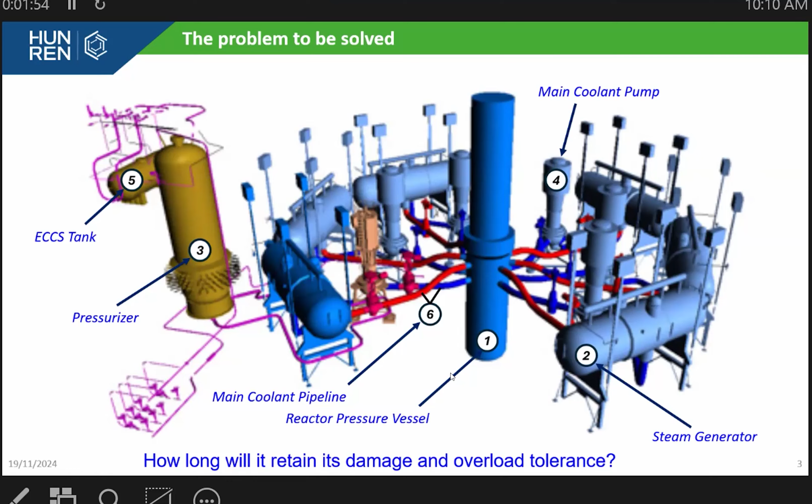These systems are designed for a finite lifetime, called the design service lifetime, with design safety calculations. The design safety calculations give a first value for the prognosis of the lifetime of the unit. This calculation must be repeated for the operating system—the so-called structural integrity calculations—which give a value for the technically allowable lifetime of the unit. Because of better materials than assumed during design, these give a higher lifetime.

Nowadays we face a new challenge because owners want to use these units in the so-called long-term operation regime, which is more than two times the original lifetime, when some synergetic effect in aging can appear, but nobody knows when.

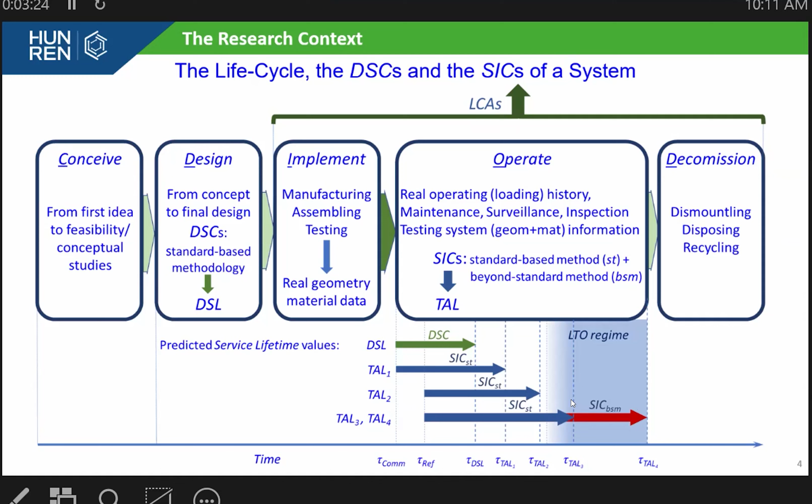That's why we started a research project about 6-8 years ago to see what the possibilities are to improve the calculation methodology.

At first, we made an overview of the design safety calculation methodology, which is based on a disciplinary worldview. These calculations form a loosely coupled system of thermal field calculations, stress strain calculations, aging, and fracture mechanical calculations. The thermal field calculations are based on the classic theory of heat conduction, and the stress strain calculations on strength calculation methodology or theory.

The fracture mechanics calculations are based on the global fracture mechanics approach, but the description of aging has at the moment no unified or accepted theoretical basis.

The main question of the research was how to generalize the methodology so that we can justify that a new approach is good or better than the original one, and that the generalization is plausible. It is not a trivial task.

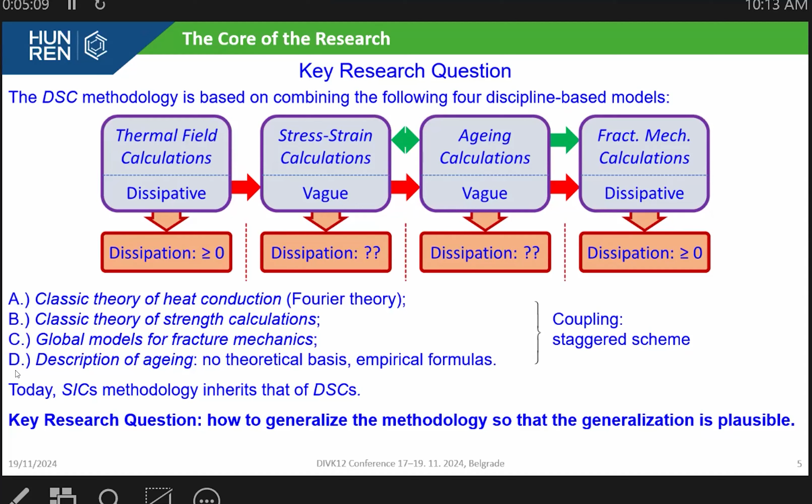At first, I want to give a general note. We know that human culture is a unified one, or there is only one culture. But nowadays a progressive specialization can be observed, which causes many problems even in complex technical projects. We have to understand that any cultural field, any scientific field, or any other cultural field offers merely partial information about the world.

But there are connections between the various fields which may not be immediately apparent.

This means that different branches of culture are not independent of each other, but they form a so-called entangled system. The notion of entanglement was originally introduced in quantum mechanics 90 years ago, and nowadays has a bigger respect.

This entanglement is the essence of a so-called holistic worldview, and it means that philosophy, science, engineering, and practice must be seen as an entangled system.

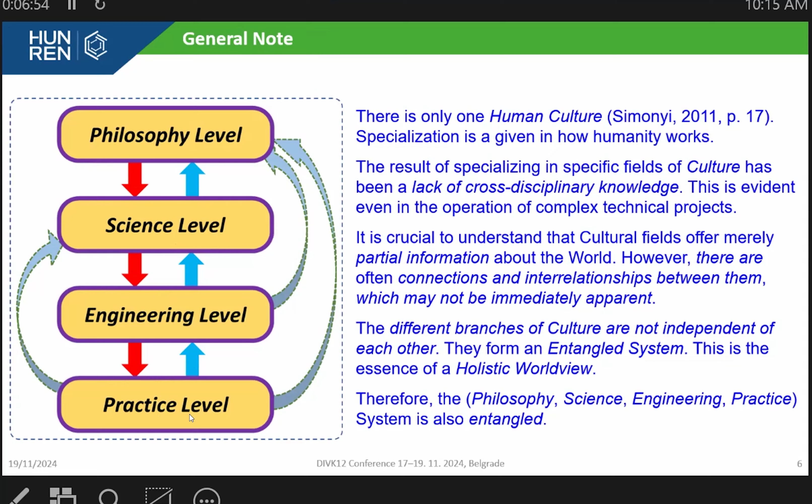Why is philosophy important in this system? Because you might think I'm a bit crazy, so I remind you that the scientific methodology widely used in our sciences is based on a very old methodology, which comes from Greek philosophy.

It's the so-called analytic-synthetic method of Aristotle, which is very good for development of a discipline. But in this method, revising the basic principles of a theory is excluded from the methodology. The methodology finishes there.

That's why I made a literature study, and it became clear that there is another methodology, also since the Greek times. It was first formulated by Plato. It is called the analytic method, which allows one to revise the basic principles of any theory. Revising the principles of the theory is inherent to the method.

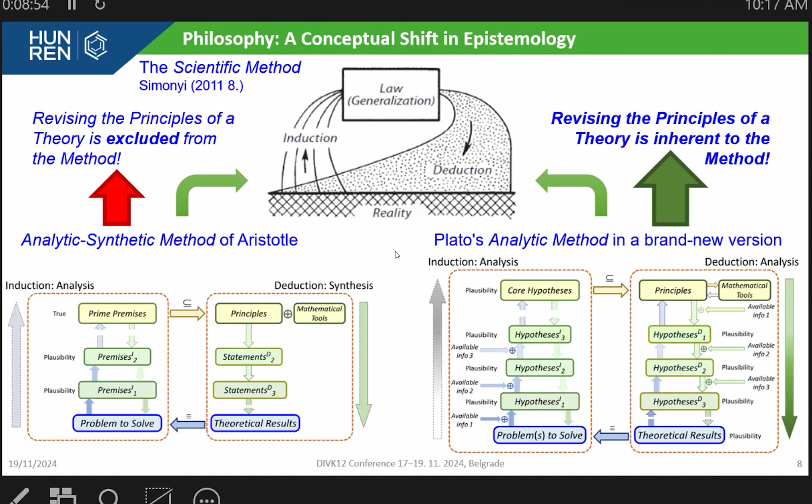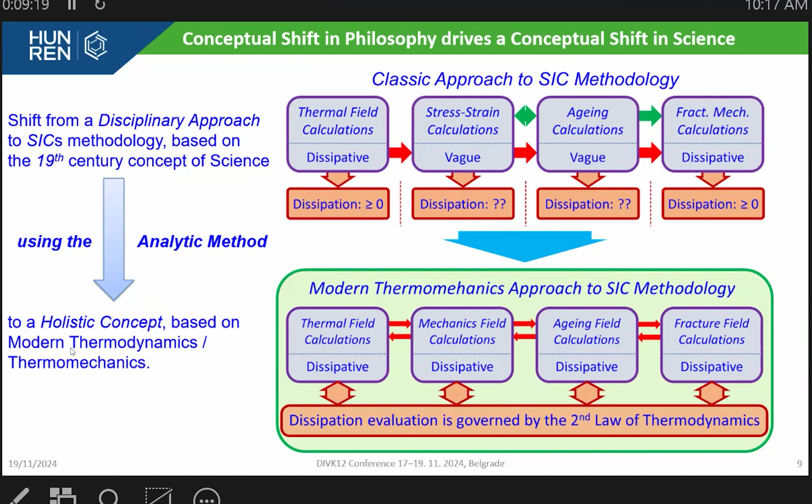So we changed the methodology. The analytic method can be seen as a generalized new scientific methodology, like a conceptual shift in epistemology. This conceptual shift on the philosophy level helped us shift from the old disciplinary approach to a modern holistic concept, based on modern thermodynamics.

So what are the consequences on the scientific level? The main message of the new view is that the new methodology is based on an energetic-entropic approach, which unifies the existing approaches in structural integrity calculations, or anywhere.

Modern continuum thermomechanics belongs to the energetic-entropic approach, or energetic-entropic paradigm, because thermodynamics is a field theory developed to describe time-dependent dissipative processes in inhomogeneous systems with finite state change rates.

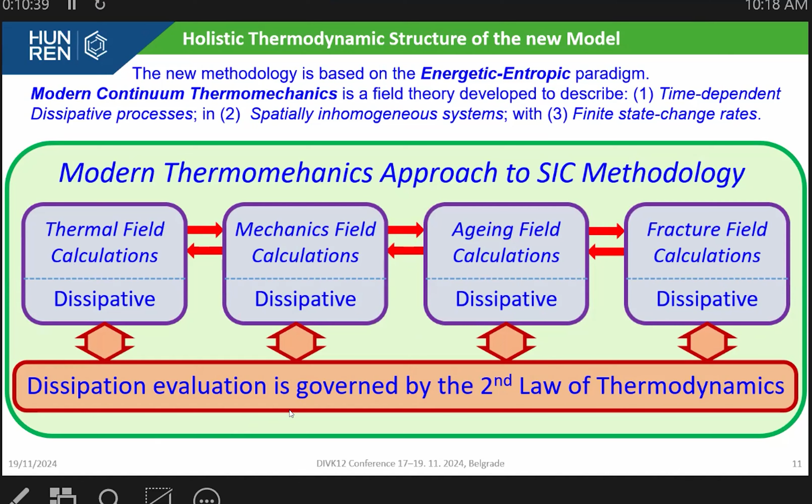So the novelty of the method is that the dissipation evaluation is governed by the second law of thermodynamics, which acts like a common rail fuel system in modern diesel engines.

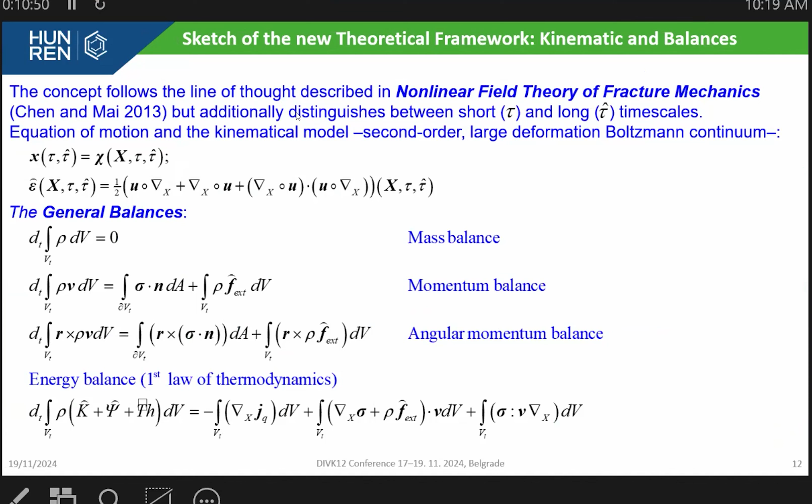So the concept follows, in our approach, the nonlinear field theory of fracture mechanics. I will skip the technical details.

The main novelty of this approach is that the J integral is path dependent in general. It means that the J values around the crack front can be different from the far field values. This new J integral is inherent—it's a consequence of the new theory—and this paves the way for the integration of local approach models.

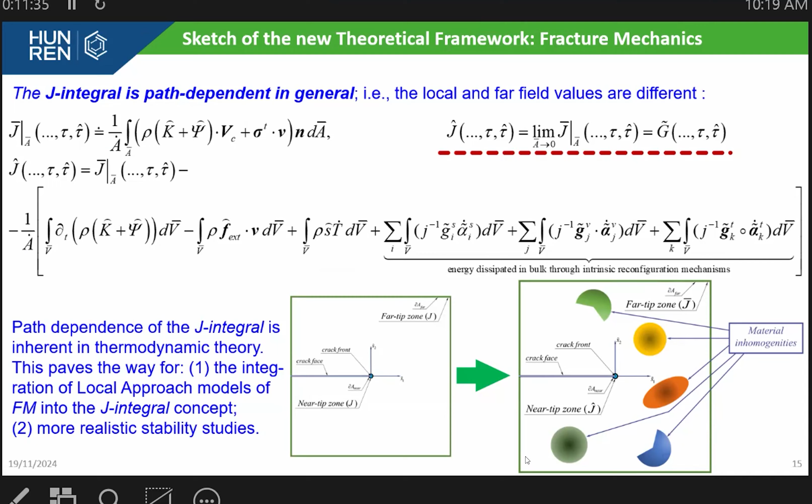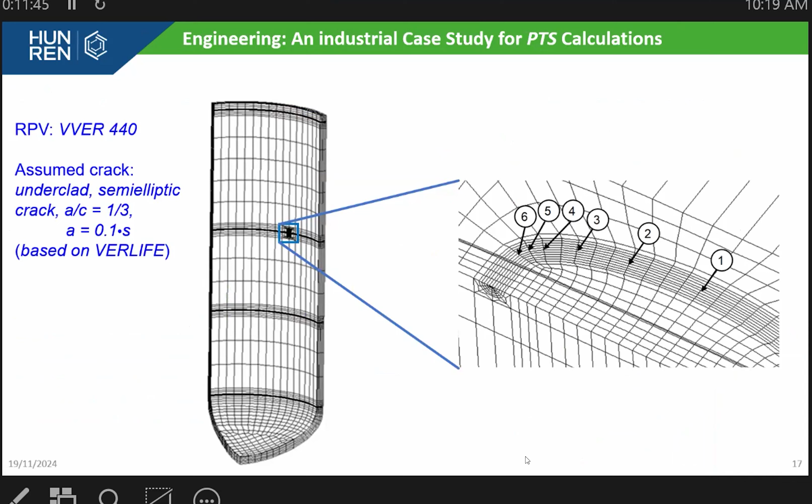To use in fracture mechanics, at the engineering level, we made an industrially relevant case study for the so-called pressurized thermal shock calculations, based on a safety relevant thermohydraulic situation.

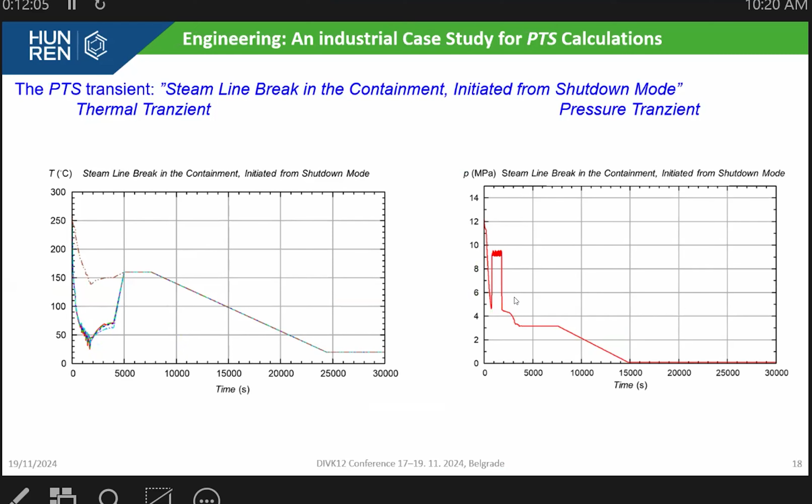Where repressurization during the transient occurs. We calculated the results for the new state, elastic-plastic states of the reactor pressure vessel materials, and for the aged state of the reactor pressure materials.

And as you can see, in both cases, from a certain point of the transient, the path dependency of the J integral occurs, which is most significant during unloading—the so-called warm pre-stress effect.

And these calculations are meaningful in the new framework, while this situation cannot be interpreted with the J integral by Rice.

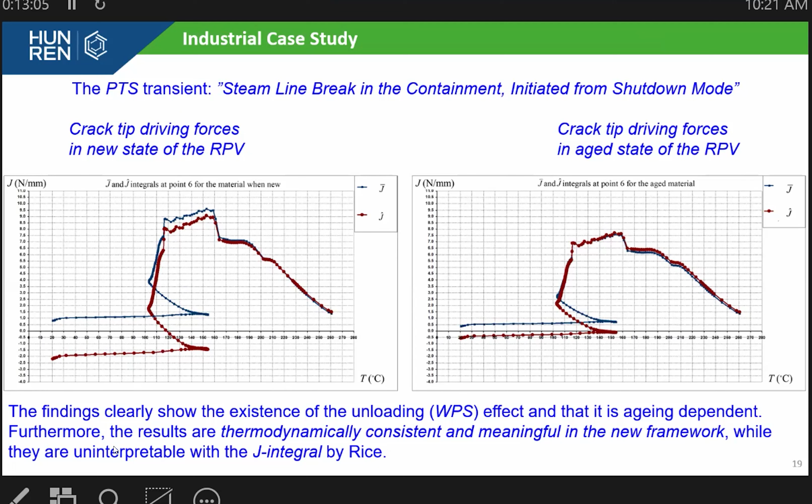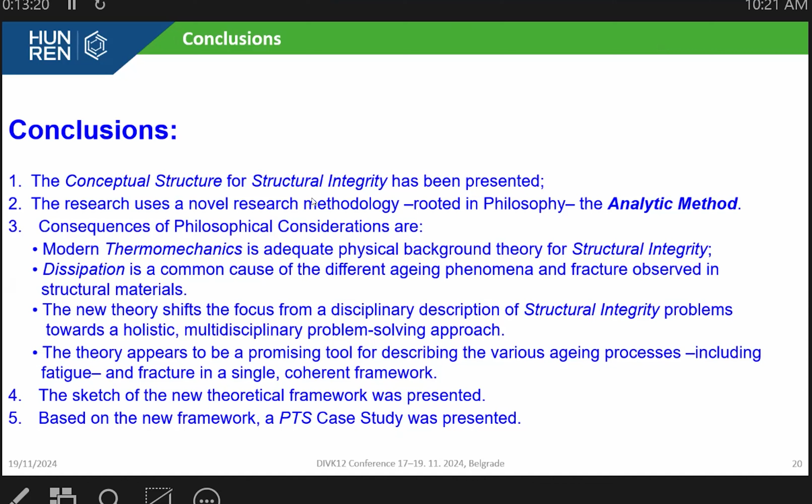So in conclusion, the main message of my talk is that the novel research methodology, the analytic method, can be seen as a generalized scientific method. Thank you for your kind attention.